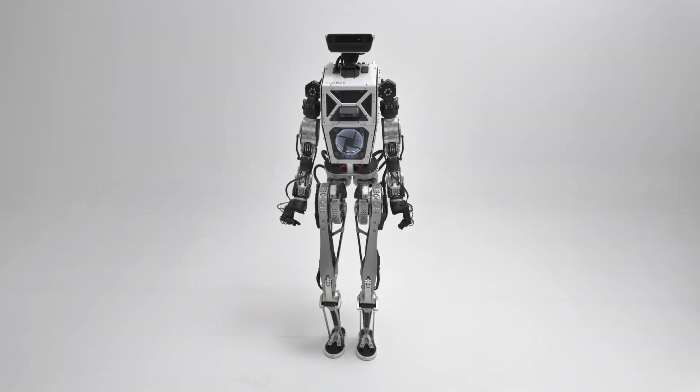I came to the States in 2014 to pursue my PhD in robotics. During my PhD, I had this passion to start my company, Westwood Robotics, and build humanoid robots for humanity to help people.

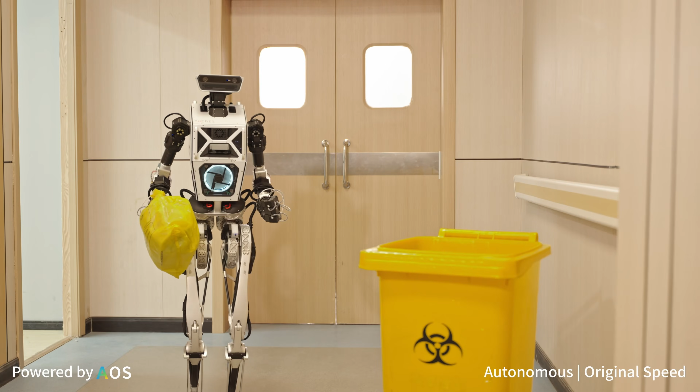There are always mechanisms or designs you have in mind that are almost impossible or too expensive to manufacture. You gotta design it so that it's manufacturable, not just manufacturable, but manufacturable in an affordable way.

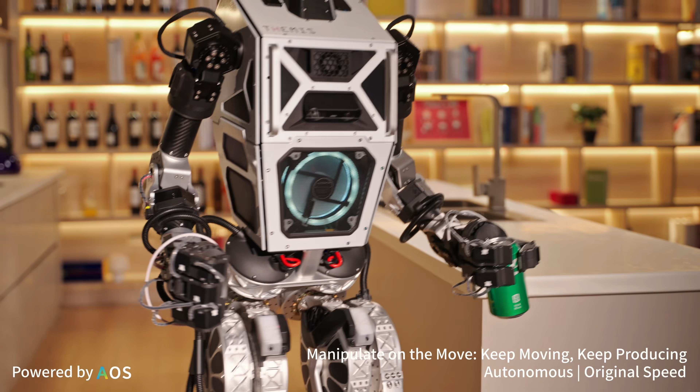The other part is validating. You have a really cool design, you have those smart ideas, right? But then some of them are just impossible to design strong enough. You gotta make changes to it. Sometimes you just find yourself in a dead end.

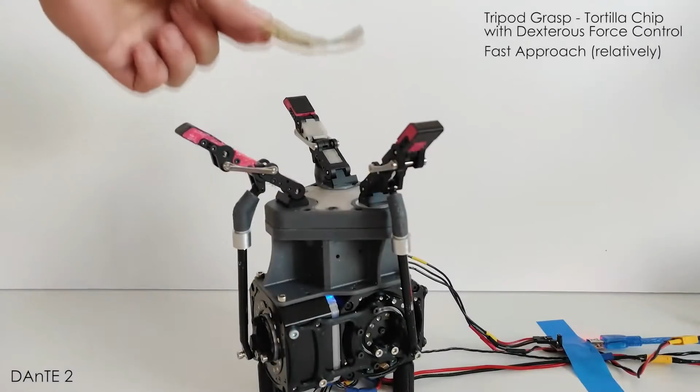I'm not a conservative prototyper. I'm the guy that if I have something that could work, I'll just go ahead and make it. But then I'll definitely come back to modify it.

With SOLIDWORKS, first of all, the 3D designing tool or 3D designing software, you can realize everything, right? I already have a mindset of how it should be done. And I know exactly how much this would cost because I can already select if I should go with 5-axis or 3-axis while I'm designing.

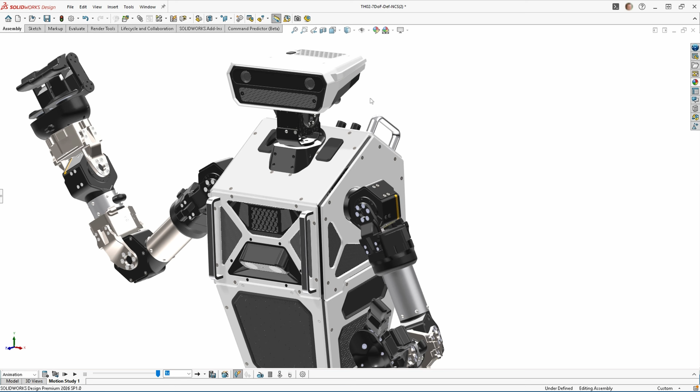Simulation has been a standard workflow for us. We gotta throw any design into simulation first before we move on to anything else, because without that validation, we're just not confident enough of making it at all.

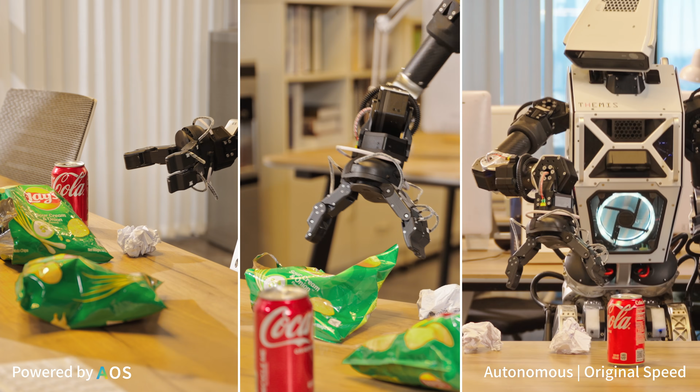It's always the design capability of creating something in your mind into an actual part, smoothly transitioning into simulating that part to validate if it's useful or not — a very smooth connection and transition.

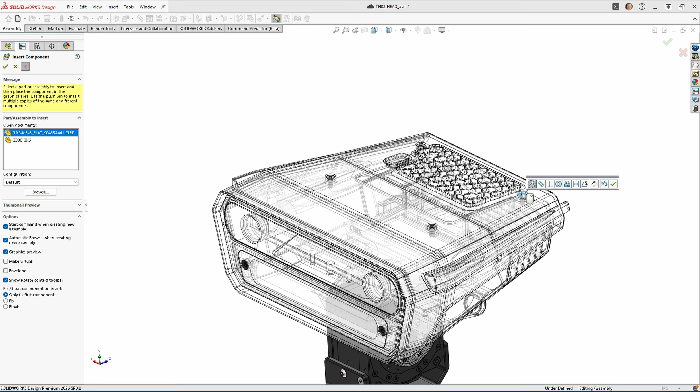What I think about SOLIDWORKS — it is one of the most important tools, one of the most important processes of generating our robot. I would panic if I woke up and realized I don't have it anymore.